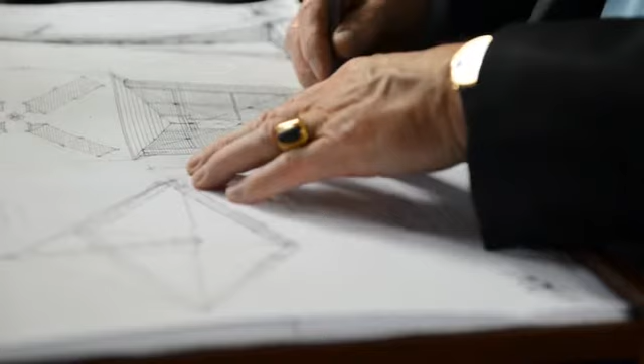Energy, clean water, the environment. As global population increases and nations grow in prosperity, our need for cheap, efficient energy, clean water, and a livable environment will continue to expand. These are the 3 key challenges facing humanity in this century. There are also 3 areas of significant opportunity for those willing to tackle those challenges with clever, innovative solutions.

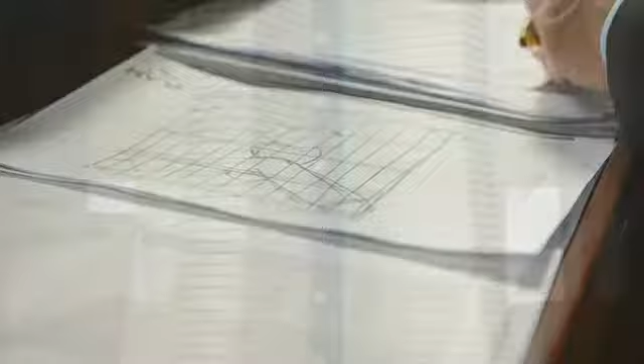Imagine a landmark building which approaches these challenges with an integrated design and engineering strategy to take advantage of those significant opportunities and provide a solution which tackles all of the needs head-on. A building which harmoniously combines proven technologies to provide for all of its own energy needs and more.

Elemental Flow Towers is this building. It takes its name from the managed flow of clean energy, which is drawn from the wind, from water, and from the fire of the sun, to provide one unified system of clean energy generation and storage.

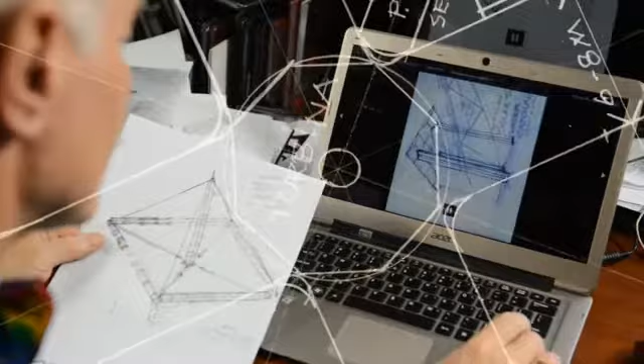Our engineering calculations demonstrate that Elemental Flow will generate more power than it uses. It will produce this power right where it is needed, so as to fully eliminate the need for long-distance transmission and the associated losses. And its every system will be built to use latest technologies and practices to minimize its energy use and environmental footprint.

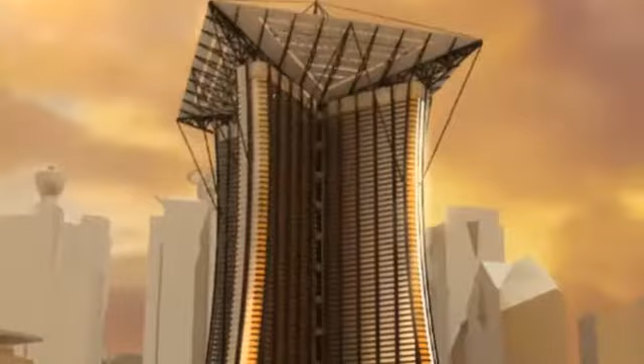It is also designed to take maximum advantage of natural light, which will provide comfortable surroundings for its occupants, be they residents, workers, customers, or even hotel guests. We are starting with a highly developed sense of detail and positive user experience in mind.

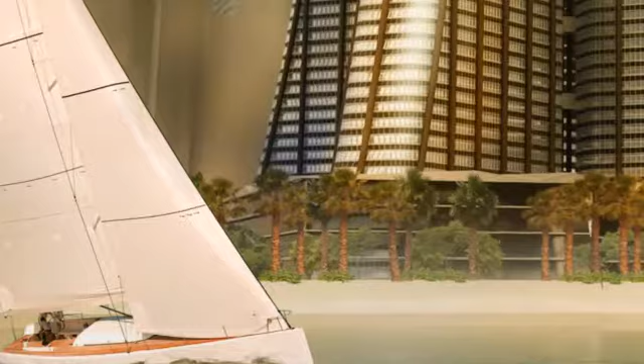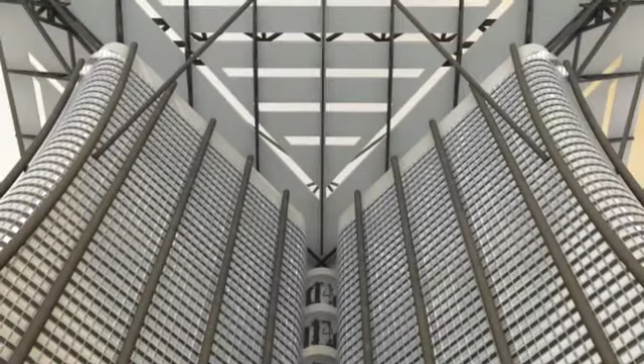The building's owner, in addition to economic gain, will achieve substantial marketing advantages, plus a massive public relations coup, which will have long-lasting effects. The project will enjoy inherent marketing value as a world leader in terms of design and its approach to energy generation and management, and the global awareness campaign which will surround it will translate directly into lower marketing costs and higher occupancy. In a highly competitive environment, these advantages will be of strategic value.

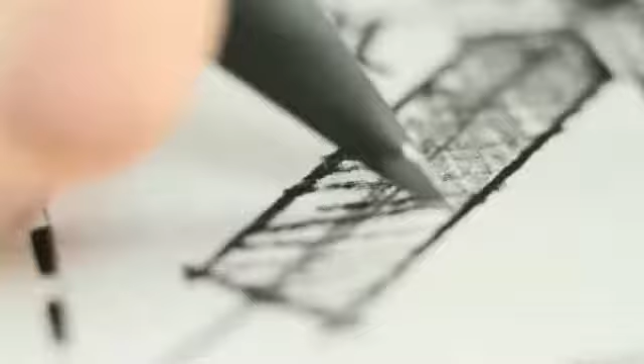Elemental Flow Towers relies on its distinctive design to make its mark and set down a milestone on the road towards clean, livable cities of the future. Beyond just wind, or just solar, or just geothermal, the building combines several energy production and storage systems in a mixed-use landmark project, designed from the first architectural sketch as a total solution rather than an afterthought or worse, window dressing.

The energy system uses advanced photovoltaics, convection thermal conduits, highly efficient and whisper-quiet wind turbines, and several different kinds of water turbines depending on the site and local conditions.

Every component of the overall system is designed to work with the surrounding elements, not against them. Rainwater, in addition to being collected and used on site, becomes a store of energy.

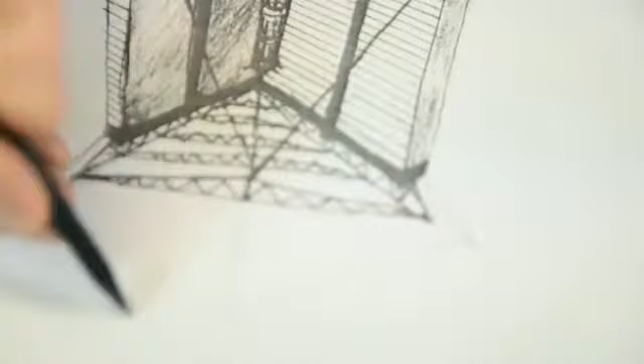The sun, in addition to feeding the arrays of photovoltaics, powers the thermal conduits, and the building itself is an enormous wind trap designed to accelerate the breeze from all four directions of the campus to drive the new generation adjustable turbines on all levels.

Elemental Flow Towers points the way to how buildings of the future will be built, if we want our children to live in the kind of cities that we would wish for them.

Thank you. So this is just the start, to give you an appetizer of what's to come. There'll be more technical details in a minute, and we might change to a 3D view of the model, seen from different perspectives. And I will say the next part in Polish, so we'll have to translate back the other way.

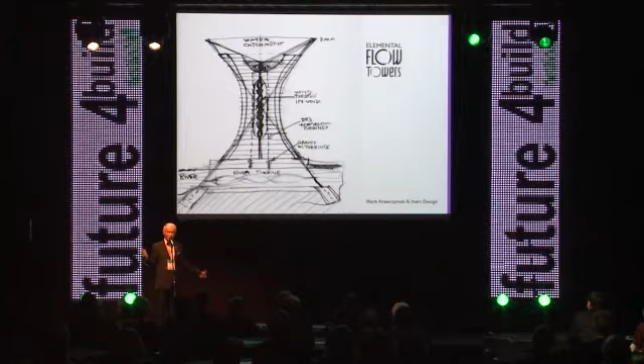Now, this whole process started with what we thought was a tree of life. This was one of the first sketches we used. Why aren't the buildings catching sunlight and water like trees do? I mean, trees survive for a long time. They've been around for ages. They use all this energy. They work with the environment, with the elements in the environment. We have to also do this with buildings.

We've been defensive in our building construction since medieval times, when we sat in a hut and the thatched roof used to throw the water away and waste it into the ground. Well, we can't do this anymore. We can't just keep on throwing water away down the sewers, down the stormwater, and clean it 100 kilometers away in a water treatment plant.

We have to use the water where it's clean, where it's coming from the rainfall. It's still relatively clean before we pollute the planet anymore. We should be using this water on the spot, without transmission through thousands of kilometers of sewer lines, stormwater lines, the same as with electricity. There is a better way to do all this, but we have to think afresh.

So elemental flow towers will look like this. There are many variants of this. We will adapt each building to each location. We have 5 locations in mind in the world right now. We are in discussions with Dubai. Hopefully there may be a chance to maybe do this in Thailand. Climatically, geographically, this is the ideal location for us. It may be Mexico, it may even be Ireland, or it may be Slovenia. Any of those places are a potential good site for this project. It could be Poland.

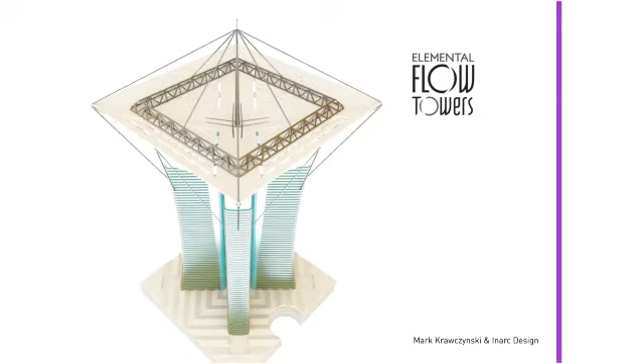I think Poland has the greatest intellectual advantage because it has enormous intellectual power and great education. We haven't got the political will to do very effective big projects, apart from a nuclear power station, which I hope will not come to fruition.

But we have amazing design ability, which we should show to the world. Perhaps this should be our symbol of Polish success. We are looking for new icons, not the Palace of Culture, not Auschwitz. We need icons in Poland. I think the icon in Poland could be the intellectual energy that went into this project.

It is only the beginning. This is only the sketch design at this stage. We need another 6 to 12 months of design development to make this project a reality to be built. But the basics have been done, and I'm very pleased that we've done this so far.

Here you can see a few visualizations of this building in various locations. This is the solar array roof, which is amazing construction, but do you know it's basic building technology for bridges? We've been using this sort of technology for 40 years, but not on buildings. We've been building wonderful bridges, but why can't we build a large catchment area on the roof of a building using simple bridge technology? These are simple bridge construction elements.

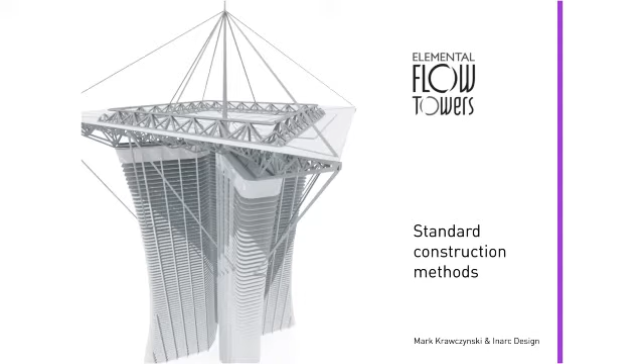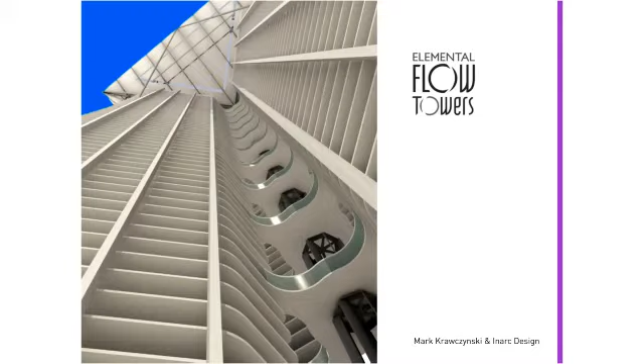This may be clad in different materials, it could be enclosed. We have still a lot of details to work out. In the center of this building is an enormous set of turbines, which are being driven by compressed wind. I'll explain more about this later in the next set of slides.

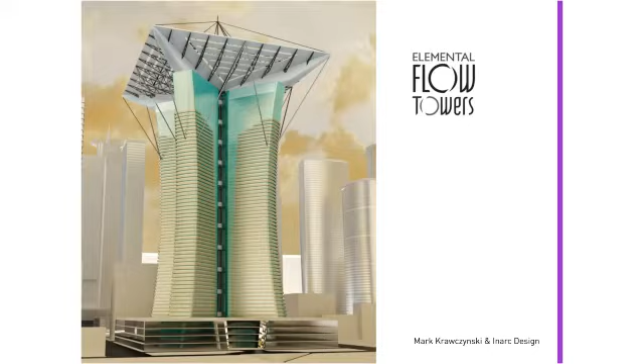ecologically friendly buildings. Everybody's trying to do ecologically friendly, but nobody's achieved 100% yet. We are pretty sure, we are very confident that we will achieve 150% of energy usage in this building, creating 50 megawatts of power for 10,000 residents. 10,000 residents is a small town.

It's a vertical town. In China, they're doing one that's going to be a kilometer high, 4 times bigger than ours. I personally think that's an overkill. They are trying to be the biggest because they want to show that they are the greatest.

We don't need to prove any points with this ecological building. We are just trying to provide the best sustainable environment and the best sustainable building in the world, not the highest. We don't have to have an ego to make it 1 kilometer high to beat Dubai. We are making the best building because that's what we need right now in the world. It's not a matter of ego beating somebody else. It's a matter of making the most energy efficient building.

So we have a very experienced team. Butch Dalrymple-Smith, for example, is a world-famous sail and turbine designer. He built the biggest yacht in the world a few years ago. He knows everything there is to know about wind power.

We've got a Polish guy, Kuba Janus, who I think may have arrived back from Wrocław right now. He's done an enormous amount of work with us. Terry Spinolo has a huge practice in Hong Kong working with us. He's won awards in China for the most ecological buildings in the world last year.

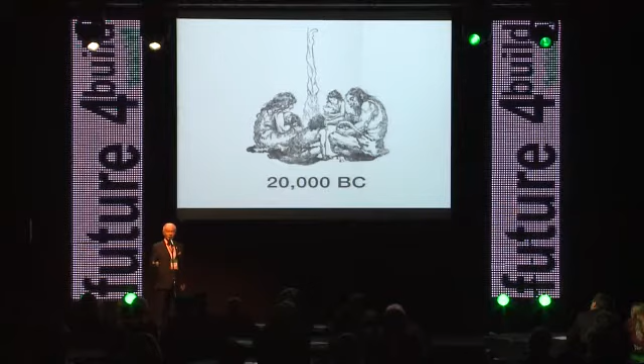This is the way we lived 20,000 years ago. We think, well, what has that got to do with today? Believe me, we are still using the same technologies — just that the fireplace, the campfire, has become a huge furnace using wood, crude oil, or coal. We're still using the same mentality. We have to change from this. All these things pollute the atmosphere.

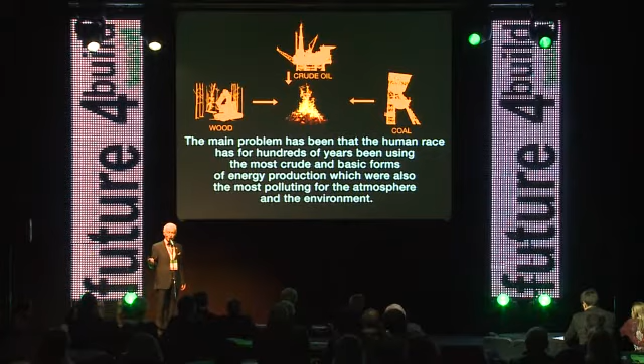We could have 1,000 campfires 20,000 years ago, when there were only 50,000 people living on this earth. Now there are 6.5 billion people living on this earth. We can't use the same primitive methods we used 20,000 years ago. It just doesn't work. We end up with this.

We start using oil, timber, gas, shale gas, or even nuclear power. They are all dangerous or polluting to the extreme. It's time we looked at our own planet and decided that we want to go clean.

Australia tried to set up a national park, a marine park around Antarctica recently. A few countries opposed it. We are playing with silly politics — a veto of a few countries, and 120 nations couldn't agree to make a marine park which would create this sort of environment in a large part of this planet.

We need to save the planet. We can't keep on polluting it. It can hardly breathe as it is.

Now, we feel comfortable here because we're in a clean, relatively clean country. But think of what's happening in Africa — it's polluting at an enormous rate. China is polluting so badly that they constantly have to fix people who are dying of lung disease. We are not very healthy in Poland because of Chernobyl, because of coal-fired boilers. We are also pretty heavily polluted by coal particles.

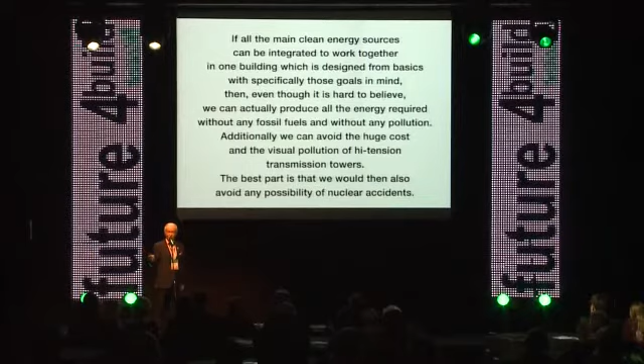Now, it sounds like an unachievable utopia that you can create all this clean energy. Well, it's because we have to start thinking from basics again, rethink our existing strategies. We're not doing this. We are repeating more of the same and doing it faster and better and making more money out of it. Stop thinking about just money. Think about comfortable living conditions, think about the environment. A new world would mean clean water plus clean energies.

Is it a utopia? The goals are to combine all natural clean elements, to collect all clean water possible, to balance and integrate all of these in one huge project. The ultimate aim for us was to produce 50 megawatts of power with zero pollution for 10,000 people living in modern comfort in one amazing, clean, vertical village.

There are some people who might have some difficulty living in a high-rise building. Believe me, in Hong Kong, they're quite comfortable with it. Many parts of the world have high-rise buildings, and unfortunately, I say unfortunately because I like a little country cottage with a picket fence like the Americans do, but we can't afford to think in those terms for the next 100 years.

We can't have 7 billion people living in little cottages with a picket fence, because the infrastructure to those buildings will be so enormous that we'll use up all the Earth's resources and poison ourselves to death. We have to start thinking high-rise because, unfortunately, everybody's moving to cities, and cities aren't whole bunches of little cottages. Cities are high-rise buildings. So let's make them as good as we can.

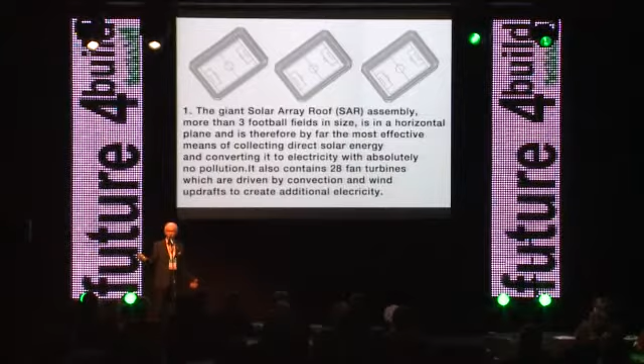We have to start thinking 7 integrated clean energy technologies, which include a huge solar array roof, 3 football fields in size. It is horizontal, so it collects the biggest amount of solar power. It's no good putting solar panels on the walls of buildings—it's not enough, the angle is not appropriate. You lose about 60% of the 15% energy that you get from solar panels. It just doesn't work, it's a sales gimmick. It has to be on the roof. The sides can be an addition, but on their own, they don't succeed.

Now, on our building, we have all the roof panels, all the wall panels. We have 100,000 square meters of photovoltaics on this building. That will produce 12 megawatts of power. Now, we are still confirming all these figures because we are trying to be conservative.

But let's think of what we want to achieve—we have to have a goal. Not just that we'll achieve 10% and be very proud because we can put an ad in the paper saying we are an energy-conscious building. 10% doesn't solve it, it's still 90% of dirty energy. Let's be real.

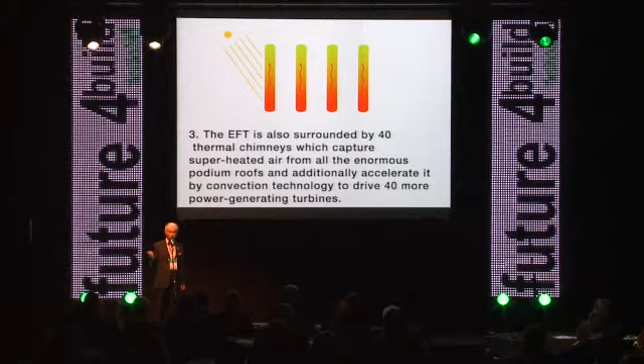It can be all clean if we think about it from the beginning. Our building is surrounded by 40 thermal chimneys which capture superheated air from the enormous podium roofs and are additionally accelerated by convection to drive 40 more power-generating turbines. It's virtually free energy, you've just got to build it into the building from the very beginning.

The giant 4 wings of this building are also molded to create a giant wind tunnel in 4 directions, which concentrates, compresses the wind, and accelerates it. Wind farms in the open field are great, but when it's blowing less than 5 kilometers an hour, they don't work. The turbines, the big wind farms, stop. In our building, when it's 5 kilometers an hour, the building compresses the wind and accelerates it to 20 kilometers. That will drive any turbine.

But you've got to think about this from the beginning. You can't just put up another 100,000 windmills and say we've done it, we've solved the problem. That's only part of the solution. The windmills are away from the city, so you've got to have transmission lines and transformers, and you lose 20% of the power in the transmission and transformation. It's not necessary.

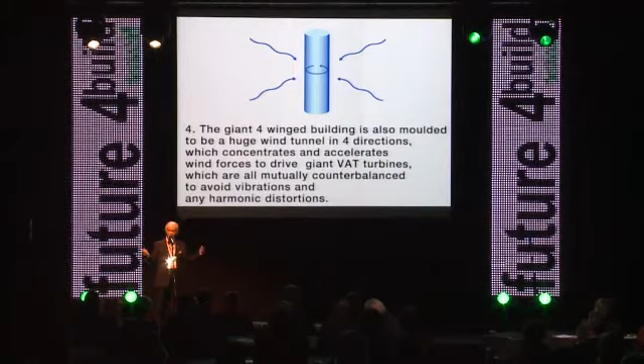Some people say that the big windmills in the country are bad for the environment, for birds, for people, for epileptics, etc. We don't need to do this, it's not the most efficient way. It was efficient 20 years ago, when Al Gore bought all these fans and had to sell them. I don't want to criticize anybody, but we are always lagging behind by at least 20 years in our thinking. Things are changing so fast.

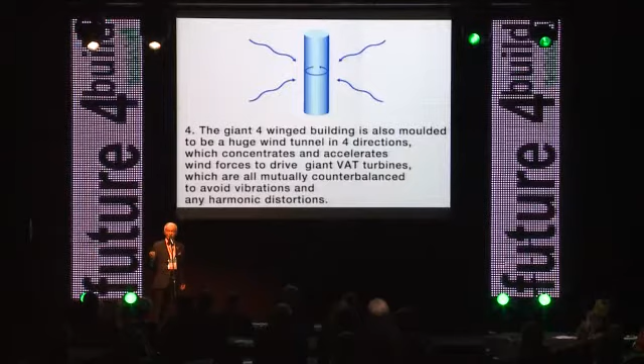Think back 30 years, nobody had a mobile phone. Think how fast that has changed, we can't live without one now. Let's use technologies that are up to date, let's combine them in a modern, integrated, smart way. Otherwise we're not going to get ahead of all this.

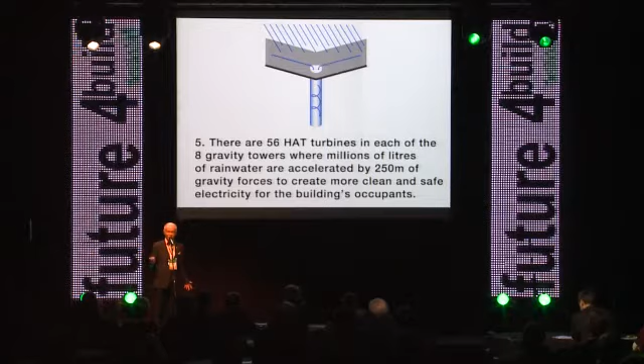Our building also has 56 horizontal axis turbines in each of the 8 gravity towers, where millions of liters of rainwater are accelerated by 250 meters of gravity. If you have water on the roof, the building is more stable—they use this on big towers in the world just for stability. But when you have water on the roof, you also have kinetic power, which can generate 6 megawatts. By dropping this water down enormous downpipes, you can build a water turbine every 7 stories, which has enormous power capacity. This is also free energy, but you've got to design it at the beginning.

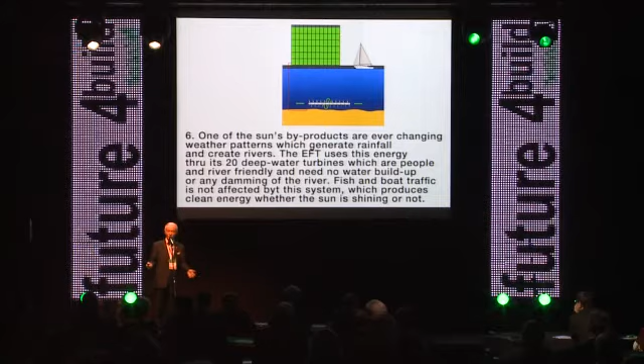In the river—most cities are built on rivers—if you have a large river, you can put in deep water turbines. People say hydroelectric power is dead, it's too old, but that's because 25 years ago you had to build a dam to make a hydroelectric power station. You don't have to do this nowadays. You have very efficient, specially molded, computer-designed deep water turbines which move slowly but handle large amounts of water. They don't turn the fish into sushi, they don't destroy navigation on the river like dams do. They're deep water, they move slowly, and they generate 6 megawatts of power for a building.

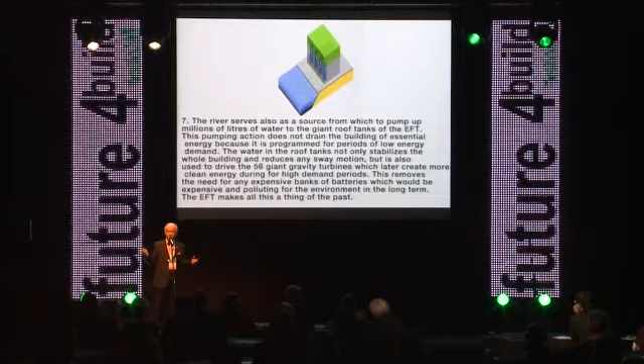During the day when you've got maximum sun, you pump water from the river to the roof tanks. At midday, this building will generate something like 40 megawatts of power, and you only need 30, so you've got 10 megawatts of spare power. At that time you pump water to the roof tanks, and at 5 to 7 p.m., which is a normal peak for buildings when everybody's going home in the lifts and people are coming in with vacuum cleaners and all the lights are on, that's when you've got peak energy need. But the sun's gone by then, so how do you save the energy? Well, huge sodium batteries are very expensive and poisonous. Instead, you keep the water in the roof tank, and at 5 o'clock you release it for 2 hours, making 8 megawatts of power. You're not losing energy, it's all there—you just have to use it cleverly.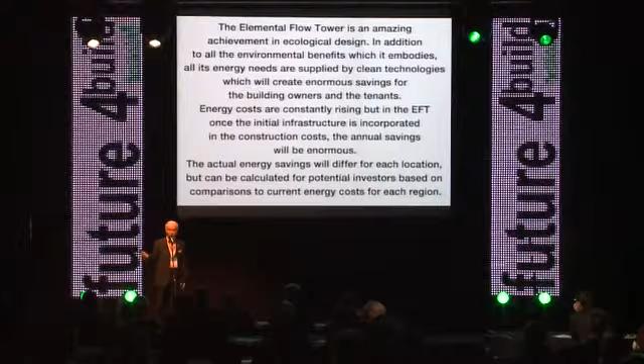So this is an amazing achievement in ecological design. It was a big challenge. We really started off asking how do you make the best energy factory in the world and combine it with really luxurious living accommodation? Well, by building a building like this.

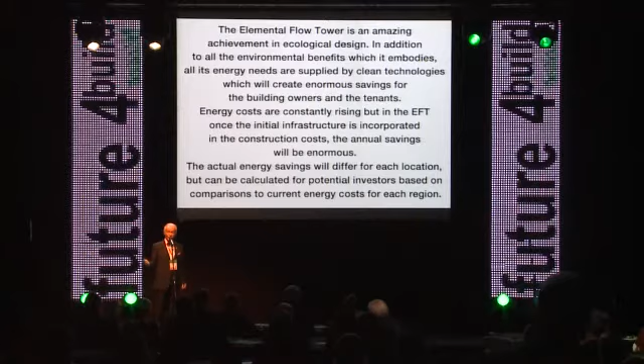It wasn't overnight, but it is the most ingenious and effective building design of the 21st century and should be a model for ecologically responsible building typology and technology for future generations. So it gives me great pleasure to present this Elemental Flow Towers project, totally powered by the sun, because the wind and the rain are also powered by the sun. It's convection, it's evaporation. We have all this energy here. We have more energy on this planet than we need if we use it wisely, and not just think about making money from old-fashioned systems.

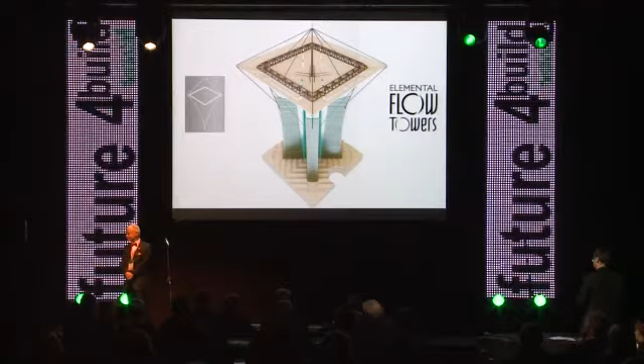I'll be happy to answer any questions, because I'm sure there are some challenging ones. The more challenging, the better, so please don't be shy. If you have an idea, or if you think something about this is not realistic, please say so. We'd like to find out if we are making a mistake somewhere. Twelve experts in the world have told us this is the greatest thing they've seen. But please, ask a question. Here we have, the microphone is just coming to you.